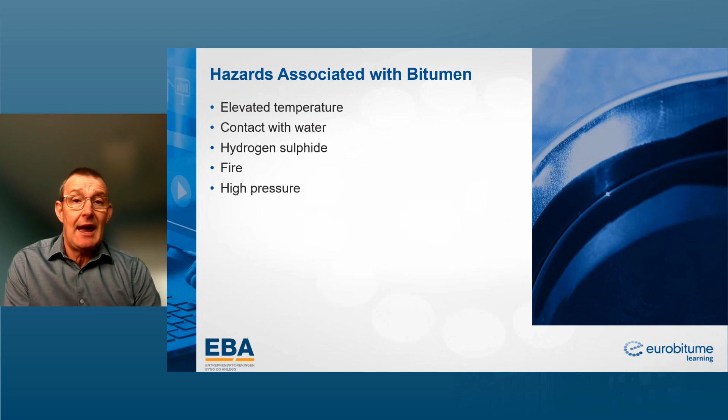So let's look at temperature. That's our key hazard, and it's absolutely true that it is the main hazard associated with handling bitumen. As I said, bitumen is stored and transported from 180 to 220 degrees. We need a lot of bitumen at those temperatures so we can move it around - transferring it from a storage tank at a depot or refinery into a bitumen delivery tanker, then into a tank at the asphalt mixing plant, and then from the asphalt storage tank to the mixing plant. Our applications range between 140 and 230 degrees Celsius, depending on the grade of bitumen used.

There has been a lot of focus on temperature reduction and implementation of what we call warm mix technologies. But really, our main focus on reducing the risk of handling bitumen at elevated temperature is reducing and avoiding exposure - following safe handling guidelines and safe methods and systems of work when loading, unloading and storing bitumen. That's our first level of control, the procedural aspect.

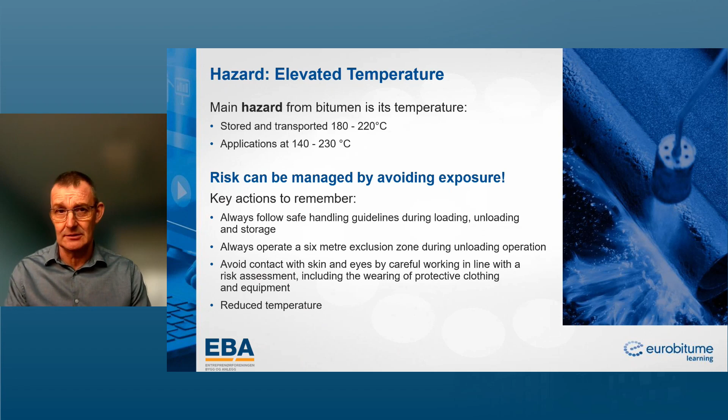In practical terms, if we're involved in loading or unloading a bitumen tanker, we need to operate a 6-meter exclusion zone around that operation, preventing anyone coming into contact with the bitumen who shouldn't be there. We need to avoid contact with skin and eyes by working in line with a risk assessment, including wearing personal protective equipment. And finally, we can reduce temperatures in some circumstances - Eurobitume would always recommend that bitumen is handled, stored and applied at the lowest temperature practical for its efficient use.

Why a chin strap? Sometimes we operate in conditions with high winds, and a high wind can remove a safety helmet - if a chin strap is there, it holds the helmet in place. A full face visor protects the face, with safety glasses worn underneath as an additional level of protection.

A neck apron - sometimes we have incidents where a delivery flex or delivery pipe bursts. Deliveries tend to be made under pressure, and this can cause a spray of bitumen to go up in the air. It's important that the back of the head is also protected, and a neck apron will do that.

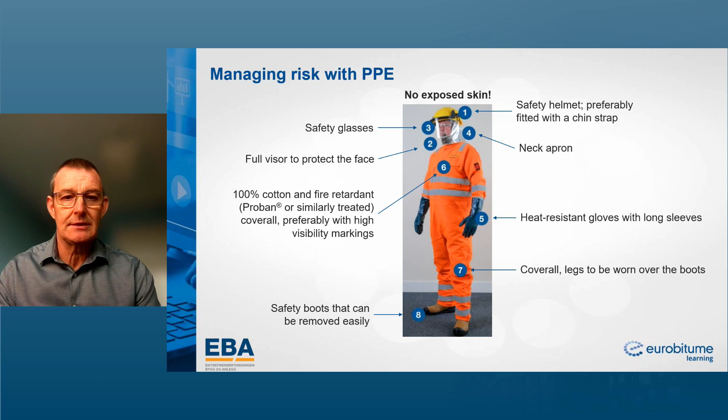It's really, really important that we both maintain the personal protective equipment and replace it on a regular basis, but also that we're never tempted to cut a corner or to not use the personal protective equipment because of the atmospheric conditions, say.

Here's an example. This is a real helmet from a delivery driver. He was making the delivery, there was a spillage, the bitumen came over and covered the visor. This was in southern Europe, the driver was delivering bitumen. The temperatures at the site were around about 35 degrees. But he said, I was hot, but I lowered my visor, and that saved him. If the visor had been up, he would have suffered serious burns.

So please don't ever be tempted to not use the personal protective equipment. It's there for a reason, and it's only effective when it's used properly.

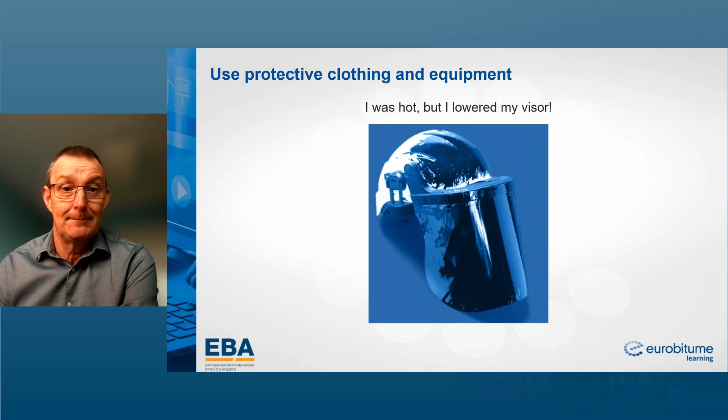Important things to consider: the first thing is to cool the burn immediately. Get it under water for at least 20 minutes. We don't want to use freezing cold or ice cold water, just cool running water for 20 minutes. That will minimize the effect of the burn.

Secondly, never be tempted to remove the bitumen from the surface of the skin, because it has the potential to cause further damage. Being burnt is bad enough. Trying to remove the bitumen from a burn will only make the situation worse. So don't be tempted to do it, please leave the bitumen in place.

If the bitumen is surrounding a limb, then there is the danger of what we call a tourniquet effect. If there is a situation where that occurs, we would recommend applying a small amount of paraffin or vegetable oil somewhere on that bitumen to allow it to soften, and that will take away the tourniquet effect.

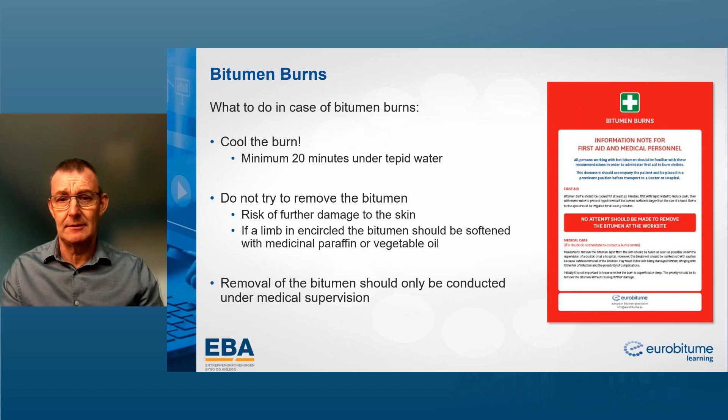And then finally, do not attempt to remove it. Attach the burns card to the person that's been injured and send them off to hospital. On the back of that burns card is advice for medical professionals, which we have obtained via working with burns specialists across Europe.

What about contact with water? The reason we need to be very careful about contact with water is if we have water within a tank and it comes into contact with hot bitumen, the water expands at a rate of 1,600 to 2,000 times, depending on the bitumen temperature.

So a very small amount of water in a storage tank or a delivery tank can be enough to cause the generation of a large amount of steam, which can be enough to cause the bitumen to come out of the tank itself and spill over the sides.

It's important to understand where we can find water. We can get water in cold tanks that have not been used for a period of time. Condensation can build up inside those tanks and it can collect at the bottom.

Also, we can get water ingress via open manlids. If there's a manlid at the top of the tank and it's left open, then rain can get in and can collect at the bottom of a tank which is not in use.

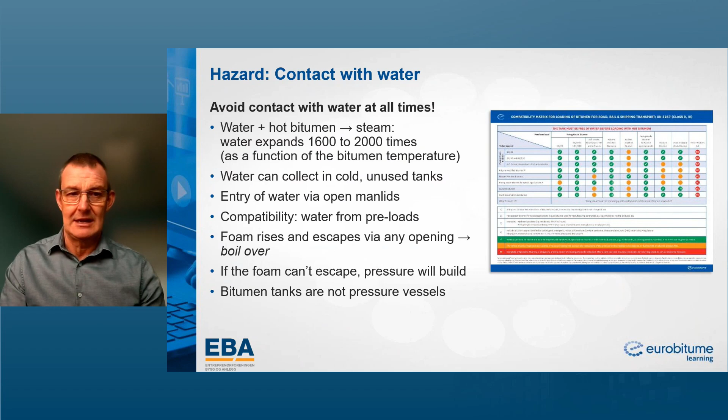Bitumen tanks are not designed to be pressure vessels, they're not there to contain pressure. As a consequence, we can get an explosion taking place within a bitumen tank if foam pressure builds up or steam pressure builds up. So I can't stress enough the importance of maintenance on storage tanks, as well as making sure that tanks are free from water. We need to make sure that vent pipes and overflow pipes are well maintained so that there is no buildup of pressure.

I now want to show you a little video which explains what can happen when bitumen comes into contact with water. This is a real situation, not dramatized, and I want to draw your attention to some things.

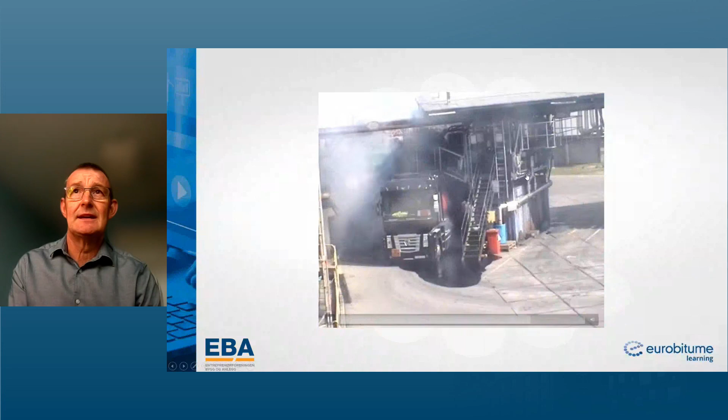Well, now let me show you what happened. Can you see? This is bitumen boiling over at the top. You can see it coming out of the bottom here, and there it comes out over the edge of the delivery.

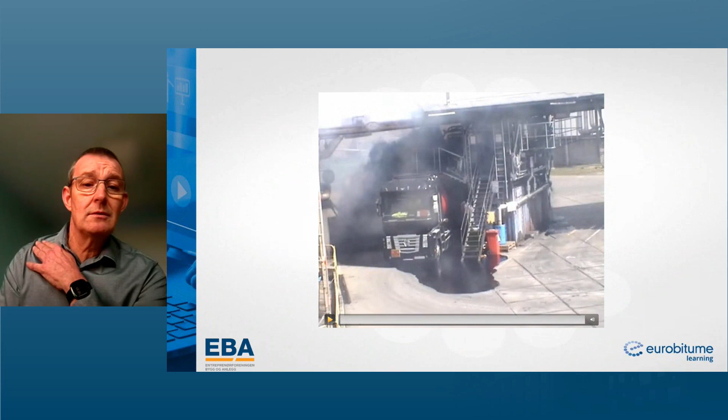I'm going to show that again because watch where the driver goes. You see where he runs away because the bitumen's coming out, and just where he's run past, a few seconds later, hot bitumen comes out. Had he been a few seconds later running away and taking that escape route, he would have been very badly burnt.

So what happened here? Yes, pre-loading checks were carried out. The depot was informed that the previous load was bitumen and loading commenced. What had actually happened was the vehicle had contained bitumen emulsion previously. It was the first load of the season coming in to take hot bitumen. There was a layer of bitumen on top of residual emulsion.

Once the bitumen that was being loaded started to melt through that layer of bitumen on top of the emulsion, it came into contact with water. The water formed steam. Steam caused an increase in volume, and as you can see, a lot of bitumen came out of that delivery tanker, causing significant damage to the loading system, and it was very, very close to being a serious personal injury.

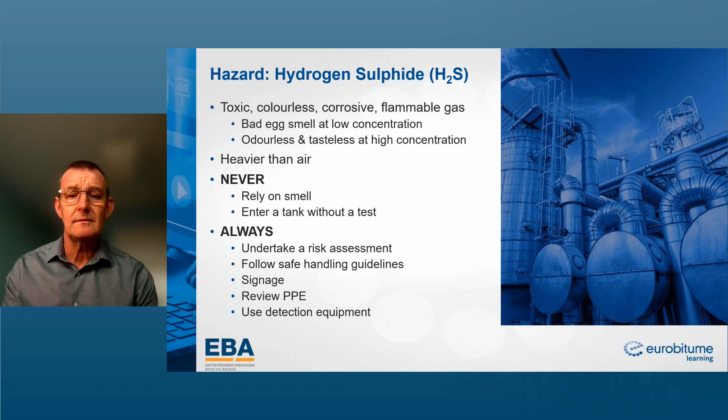Where will we most typically find hydrogen sulfide? Well, we tend to find it mostly in the headspace of the tanks. So around about here, we will get it. Now, bearing in mind that our bitumen storage tanks are open to the atmosphere, it is understandable that hydrogen sulfide can be released through the breather vent and also through the overflow vent as well.

Why is this important? Because whenever we introduce a new delivery to a bitumen tank, the volume of bitumen goes up and the hydrogen sulfide, which is present in the headspace of the tank, can be expelled by the breather vent or via the overflow vent. So wherever there is the potential for exposure to hydrogen sulfide, we need to consider our risk assessments and the use of appropriate signage.

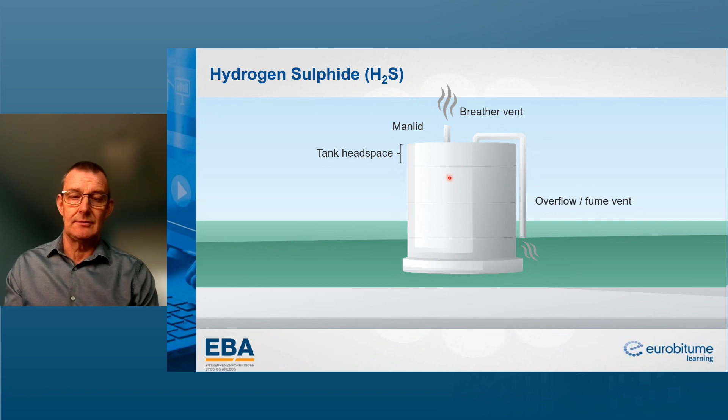The next area I want to cover is fire. Where can we get a fire? Well, a fire can start actually inside a storage tank. This tends to happen most commonly if the bitumen heating system is not completely covered with bitumen. So the tank level has reduced, the heating system becomes exposed to air, and high temperatures around the elements of the heating system can be enough to cause a fire.

Fires can also start in the insulation of a storage tank. It's actually more common for it to start within the insulation of a storage tank. The reason this happens is because as the storage tanks breathe, they release oily matter which can condense and become trapped inside the insulation. If a source of ignition is presented to the insulation, then we can get a fire in the insulation.

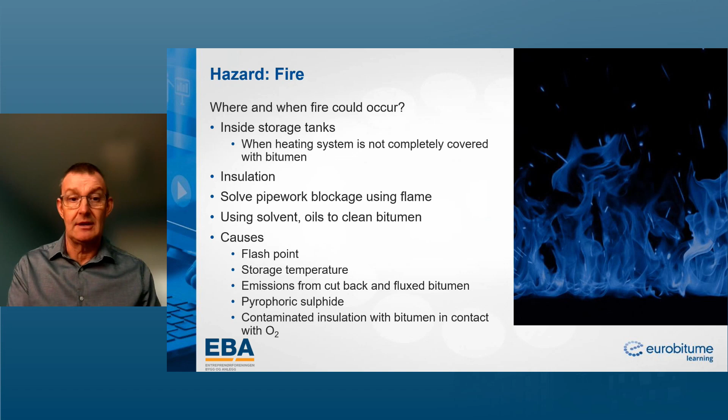We can also get a buildup of what we call pyrophoric sulfide. These are compounds caused or formed by the reaction of hydrogen sulfide with the steel or iron construction of the storage tank itself, and they form pyrophoric iron sulfides - deposits that can spontaneously catch fire. We can reduce the risk of those pyrophoric sulfides forming by having a proper maintenance and cleaning regime for our storage tanks. Finally, contaminated insulation coming into contact with oxygen and a source of ignition can cause a fire in the insulation itself.

What should we do if a fire occurs? My advice to you all is not to try and tackle it yourself. Evacuate the area, call out the emergency services, leave it to the professionals - they're more experienced at dealing with these sorts of incidents than we are.

But we can minimize the impact - shut down the tank heating systems and make sure other tanks are isolated. That really prevents the fire from spreading.

If it's a small fire, for example if it's taken place in a laboratory, only feel that you should tackle it if you're trained and competent. If not, sound the fire alarm, evacuate the area, and call out the professionals. If you're trained and competent to do so, you can tackle a fire using carbon dioxide, foam, or a fire blanket. Never ever use water, because that will simply amplify the fire.

If a fire has occurred, say in a bitumen storage tank, carry out a full investigation. Why did it happen? Investigate all the possible causes and leave nothing to chance. If it's found that the fire started in the insulation of a storage tank, it's important to remove and replace all of the insulation. Don't be tempted to just replace part of it, because if there's contamination in one part of the insulation, it's likely there's contamination in another.

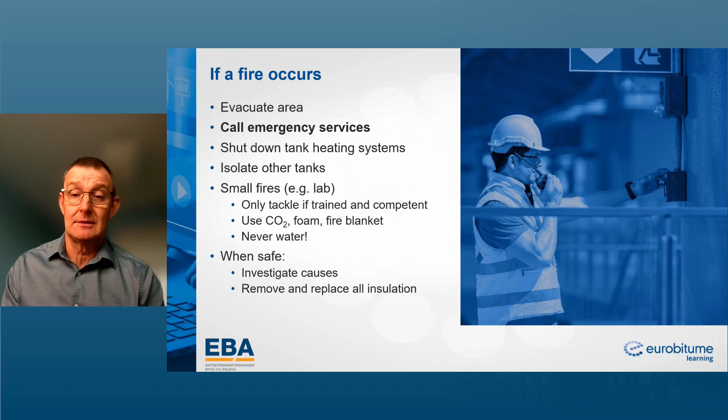I asked where the fire had started, and they said it started in the insulation. I said to them, but I had advised you to replace the insulation. And they said, yes, we did - in the areas that were affected by the last fire. When I questioned where the fire started, it was in the one section where they hadn't replaced the insulation. So always replace the insulation in all parts of the tank if you have a fire in the insulation - it makes much more sense to do so.

And finally, we're going to deal with the pressure hazard. We have to understand that bitumen tanks are not pressure vessels, so we need to manage the risk caused by pressure buildup through effective maintenance, so that we don't allow pressure to build up in a bitumen tank.

We can get buildup of pressure in delivery hoses or delivery lines where blockages have occurred, and we can minimize the chances of pipe blockages through proper preventive maintenance, effective use of trace heating systems, and effective lagging of delivery lines. We also need to be aware of pressure buildup during the process of connection and disconnection from tanks.

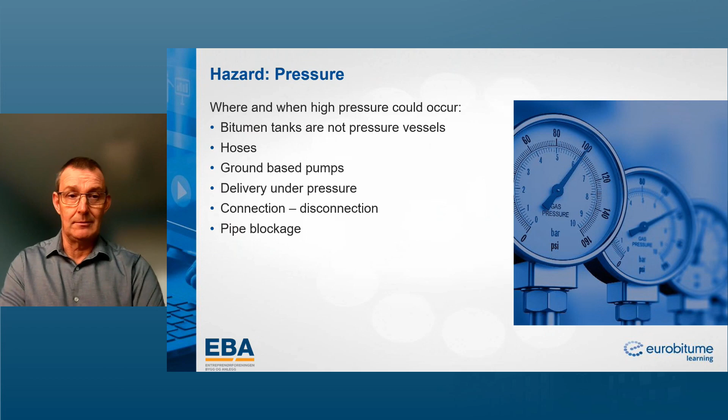Which brings me towards the end of what I wanted to talk about today regarding safe handling of bitumen. I wanted to introduce and make sure we understand the hazards associated with bitumen, and once we understand the hazards, know how we can manage the associated risks. Risk management procedures start with safe working procedures, safe systems of work, minimizing temperature, and effective use of personal protective equipment.

Now, I've covered a lot of information on the hazards, but I want everyone to take away from this the fact that bitumen is a safe product when it is handled correctly. We've put a lot of effort into making sure that bitumen's handled correctly and therefore doesn't present a risk.

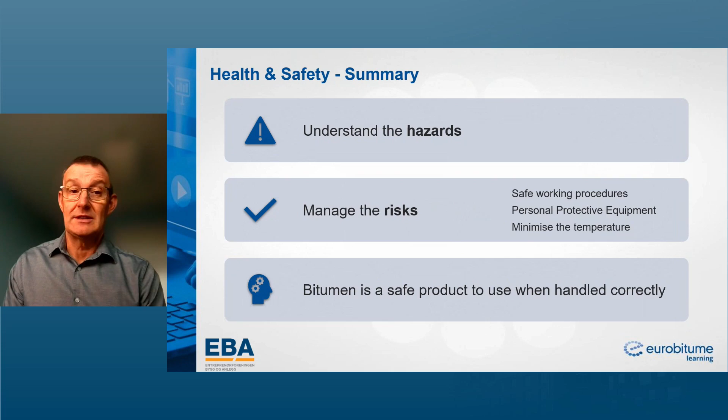Where to go for more information? Go along to the Eurobitume website, eurobitume.eu. There's a huge amount of information there on safe handling, safe delivery. There's a range of toolbox talks, short introductions, which are available to download.

You can go to the Energy Institute, where you can find a high-level document, the Bitumen Safety Code, which is currently being revised. We expect that revised document to be published, hopefully within the next month.

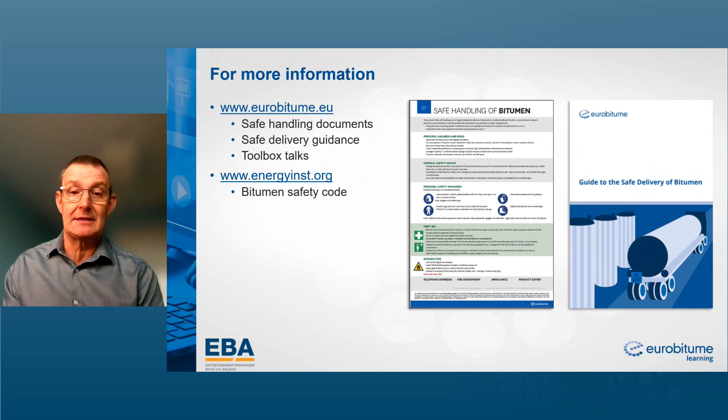And I guess that's it from me. Thank you for your attention, and if there are any questions, I'm happy to talk more.